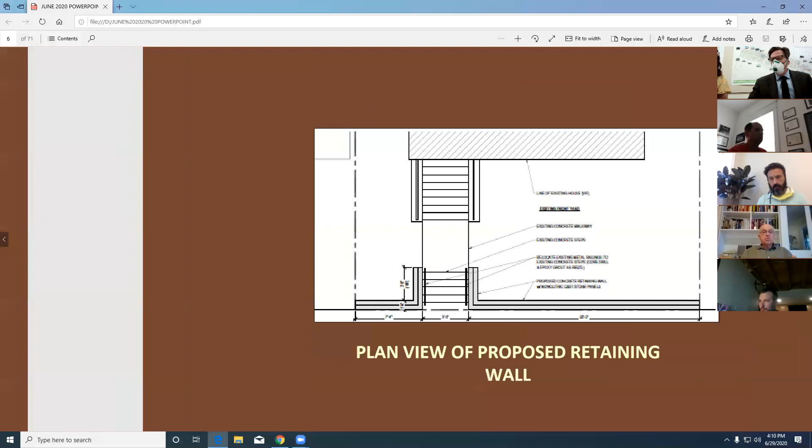No, this is Commissioner Richardson, though. I do want to just say at the outset, I will have one recusal on item B, 1116 Missouri Avenue. Okay, are there any other recusals? Okay, then let's go ahead and advance the agenda.

This is the Lafayette Square meeting, by the way. We have 4 items and 3 are in Lafayette Square, so I hope folks are ready to focus on that neighborhood for the most part.

This is an appeal of a denial at 9 Benton Place in the Lafayette Square Local Historic District. It is an application for an addition to a contributing building to the district on Benton Place. On January 30th, 2020, the applicant applied for a permit for an addition. It was denied on March 3rd.

After that, there has been a lengthy conversation with that applicant regarding this project, and the staff is recommending that the director's denial be overturned. That is our recommendation. I do know that the neighborhood association feels differently, and there are neighbors on the block on Benton Place who support the staff recommendation. So with that said, because this is an appeal of denial, I'd like to enter some items into the record.

Sorry about that, not used to having phone calls in the middle of a meeting. The first item to be entered into the record is ordinance 64689, the enabling ordinance for the Preservation Board and the Cultural Resources Office. The next ordinance is ordinance 64925, which is amending 64689. And then the Lafayette Square ordinance, which is 69112. I will note that the Lafayette Square standards have been amended under that a few times, most recently in 2019.

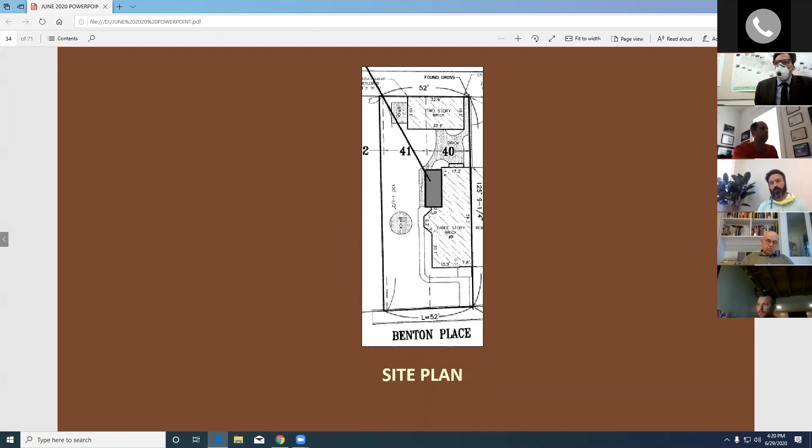Behind that, we see the design for the addition. That design is based on flat-headed windows, replicating the basic language of the model example window on the back of the building. So they're using a model example, and they're also keeping it in a frame-type appearance, because what it's replacing here with the addition is a frame open porch. Next slide, please.

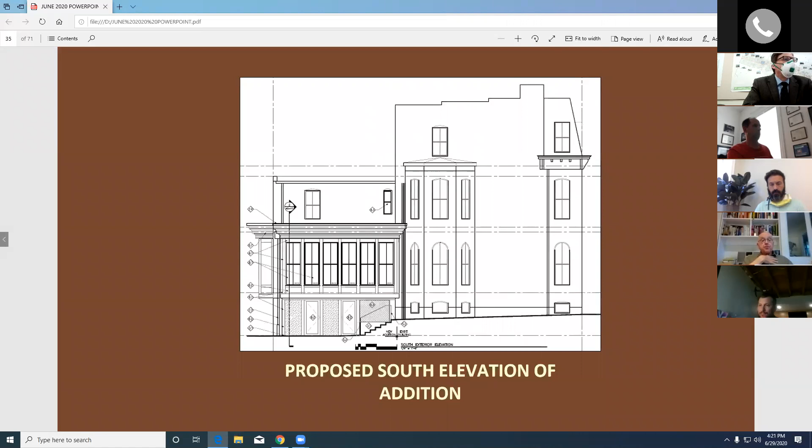So in my mind as the director, I feel like the frame porch replicates the appearance of the open porch from before, and the windows themselves are based on a historic model example, and you can't see the foundation anyway. Therefore, I feel the weeks and weeks of negotiation with staff have been fruitful, getting us to a proposal that makes sense for this site, and that's why I recommend support for the project. And with that, I'll take questions.

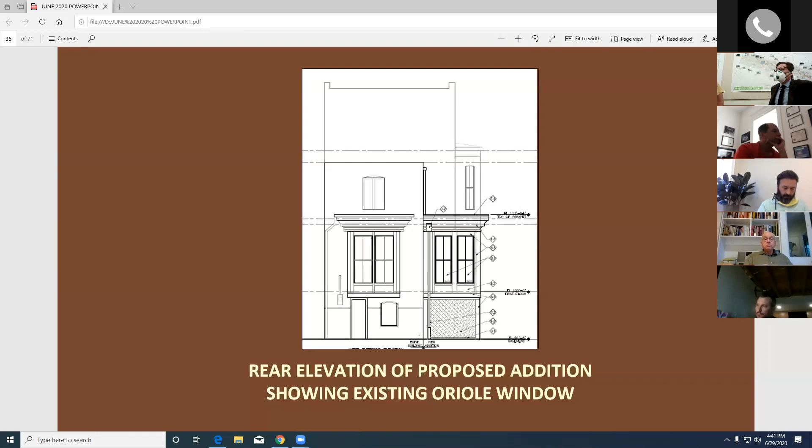Okay, we're going to do a little musical chairs here for a sec. Thank you, commissioners. Doing it this way will allow commissioners who need to leave to be able to leave. We do need to maintain a quorum.

Okay, so I think we're ready for 6152 Washington Boulevard. Bethany Moore of the Cultural Resources Office. I swear to tell the truth. This is an appeal of the director's denial for 6152 Washington Boulevard.

I would like to read into the record Ordinance 64689 as amended by 64925, the enabling ordinance, Ordinance 57688, which are the Skinker-DeBaliviere standards, as well as this PowerPoint, the agenda, this presentation, and the information submitted by the applicants and emailed to the board, including financial and other relevant documents to support the hardship claim, denied insurance claim, inspection letter from Old World Roofing, original quote from John Beal for the GAF slate line, correspondence from the owner with the new John Beal quote for Da Vinci slate, and responses from Nancy Homan of the Skinker-DeBaliviere Community Council, as well as from the Parkview agents.

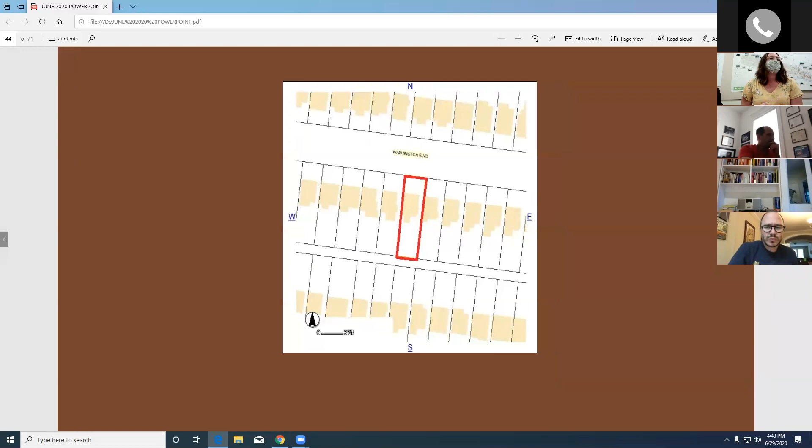So according to the standards, on sloped roofs where historic roofing material exists, that material or an approved replica material shall be used to replace it. In this case, GAF slate line has been proposed to replace the original slate. Per the standards, it does not comply because the historic roofing material is extant and is slate, so it's known, and GAF slate line is not an approved replica for slate. An approved replica would be like a synthetic slate, which would fulfill this requirement as a replica material.

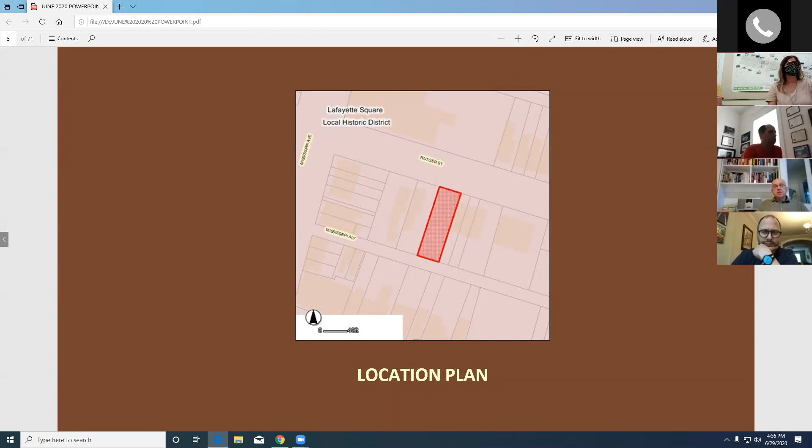The applicant proposes to construct a retaining wall at the front facade in Lafayette Square Historic District. New retaining walls are reviewed per the district standards. The proposed retaining wall does not meet the Historic District standards due to the proposed change in the slope of the yard and does not have an appropriate model example.

The historic model example that was submitted is not a retaining wall, but curbing that would have originally had a wrought iron fence on top of it. That's the reason it's being brought before the Preservation Board.

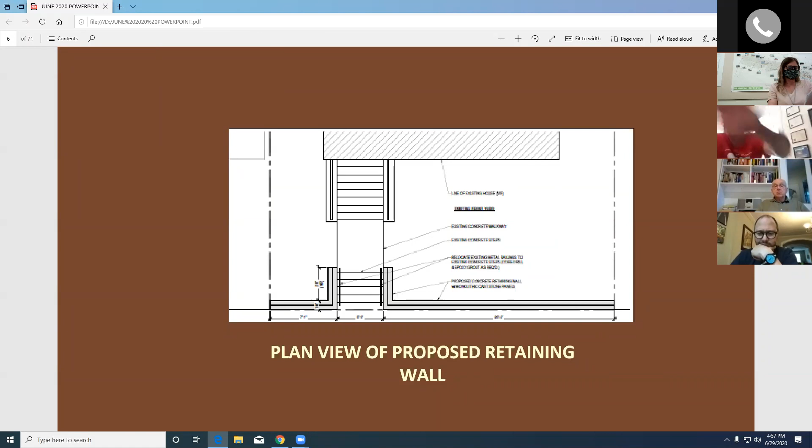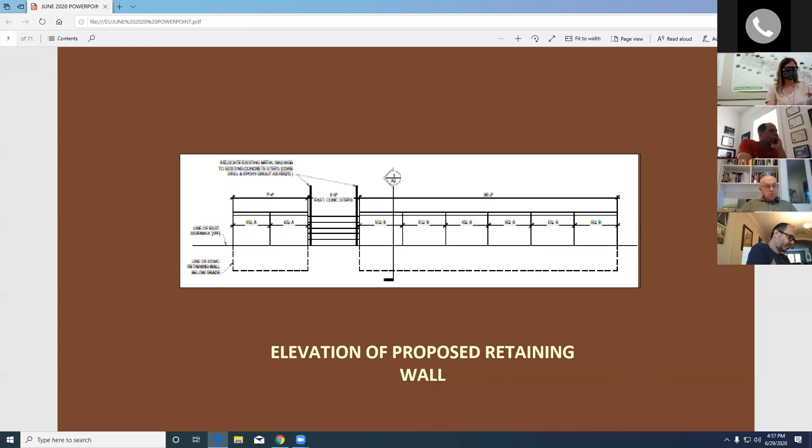This is just an elevation of the proposed retaining wall. It's supposed to be poured concrete with 4-foot panels of cultured stone and a cap.

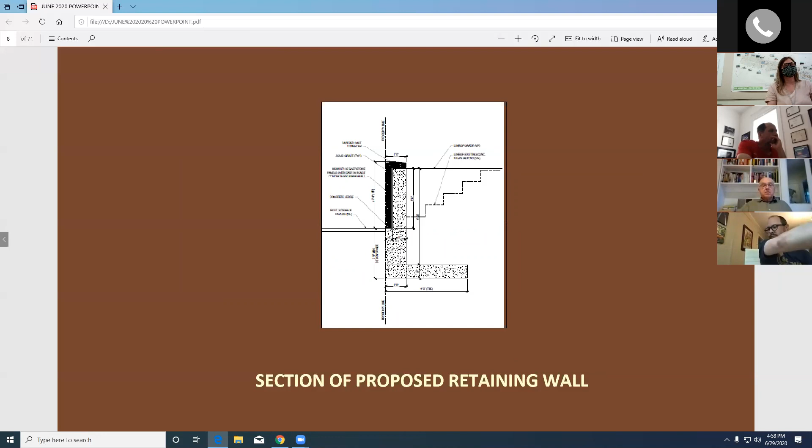The proposed retaining wall will alter the historic slope of the yard, is not based on an appropriate model example as submitted, what was submitted is not a retaining wall. The material of the wall may meet the historic district standards, but the height and design of the wall do not. Historically, you would not have found a slab retaining wall of that height or design.

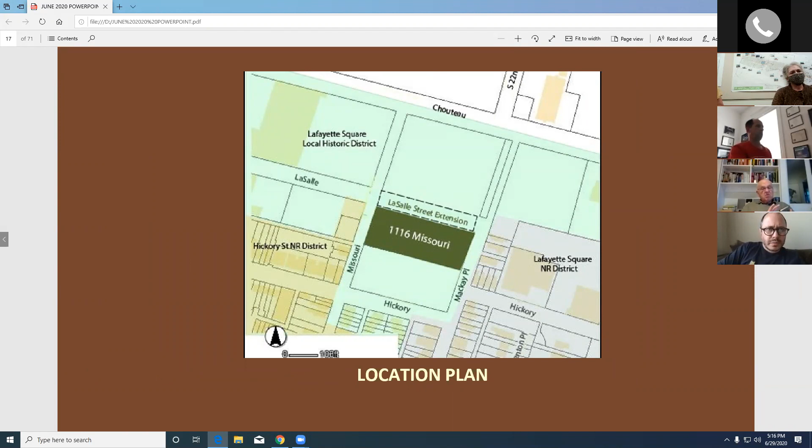Keep going, right there. This is the proposal for a 5-story apartment building to be constructed along a new extension to LaSalle Street. It will be primarily brick, 3 stories of brick on a faux stone base, with the upper story sheathed in cementitious paneling.

This is being reviewed under the mixed-use for large sites without historic context, part of the new construction standards, the Lafayette Square Ordinance.

The designers, HOK, have worked with us. Their initial submission, we were concerned, was not sufficiently compatible to the historic district fabric. Now, it doesn't need to be a replica at all, but it does need to consider things like exterior materials and scale and that kind of thing.

So this is what we refer to in staff as tier 3 of the new construction standards. Tier 1 is the ordinary infill where a model example needs to be closely followed. Tier 2 is where there is a model example identified, but there is more flexibility in its interpretation. Tier 3 allows more latitude because of its lack of historic context.

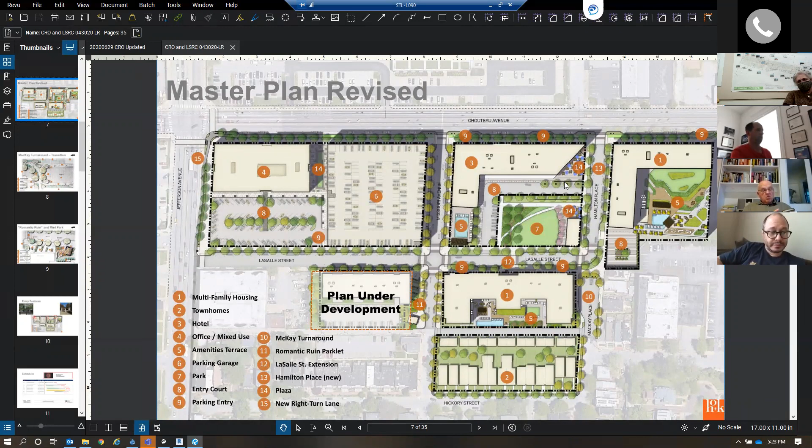Any questions on the master plan? If none, I'm going to move over to our project.

We've worked with Jan and Dan at the Cultural Resources Office and had several conversations. What we've heard was there was a desire that it was okay to do a contemporary building in this development district. However, it really needed to match the patterns of the fenestration of the historical buildings in the square. To that extent, the primary pattern in the square is this idea of a tripartite composition of base, body, and top.

When we presented this last time, we maybe had the colors a bit turned around, but here you see the three main components.

The base of the building, as Jan had said, we are proposing a cast stone. There's a series of reveals and patterns to it to give it a human scale at the sidewalk, at the pedestrian level, pedestrian experience. The body of the building is a dark brownish, reddish brick, still determining the exact brick.

That's capped off by a strong horizontal line, characteristic in Lafayette Square in the cornices that typically happen at the top of the facade, at the base of the mansard roofs. Then we go to a darker gray top that, while not mimicking a mansard roof, reads as the top of the building.

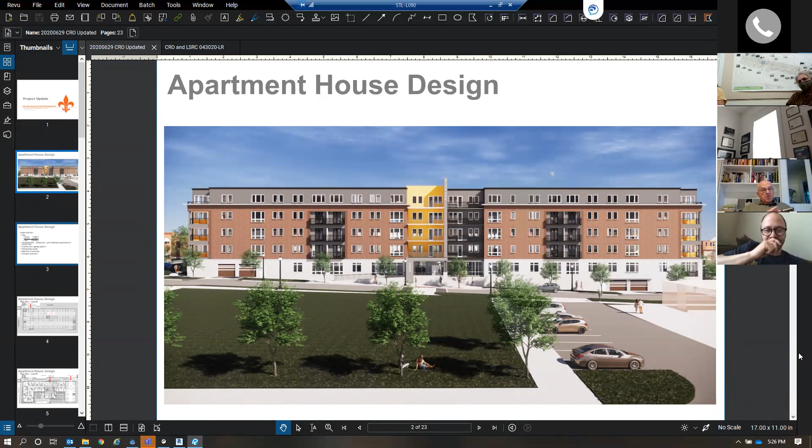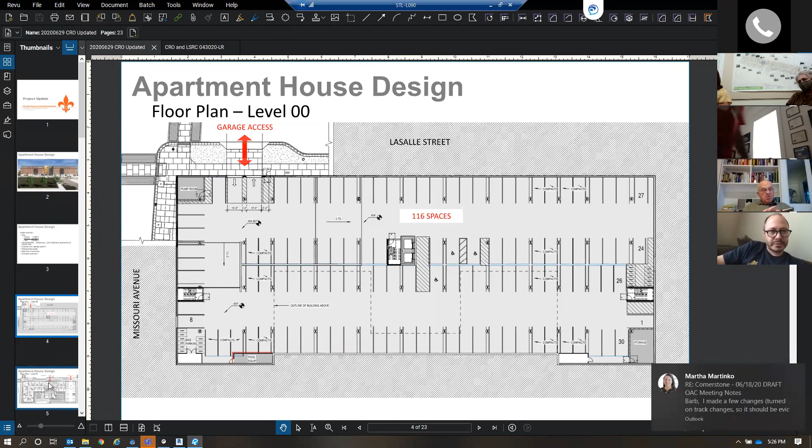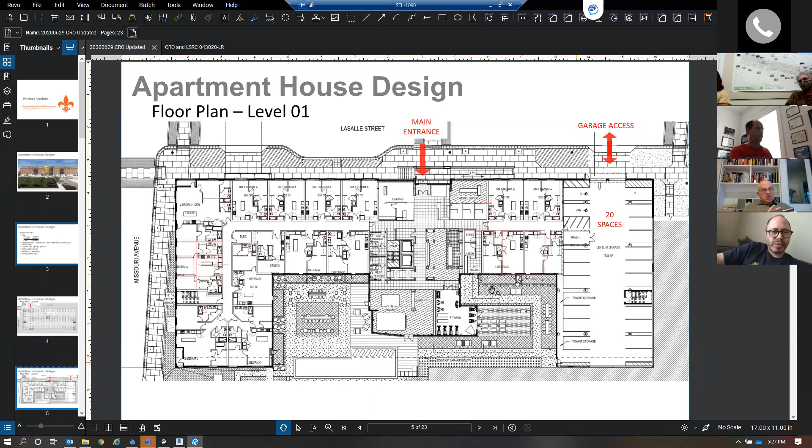The remainder of the plan has the garage entry to the east, or to the right on the plan, with 20 parking spots, and then a large amenity space central around the lobby and elevator core. The remainder of the first floor is residential, and there's a south facing amenity deck off the alley.

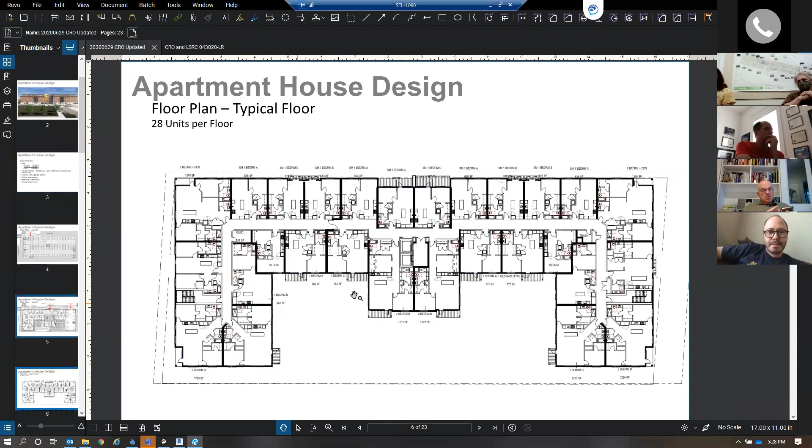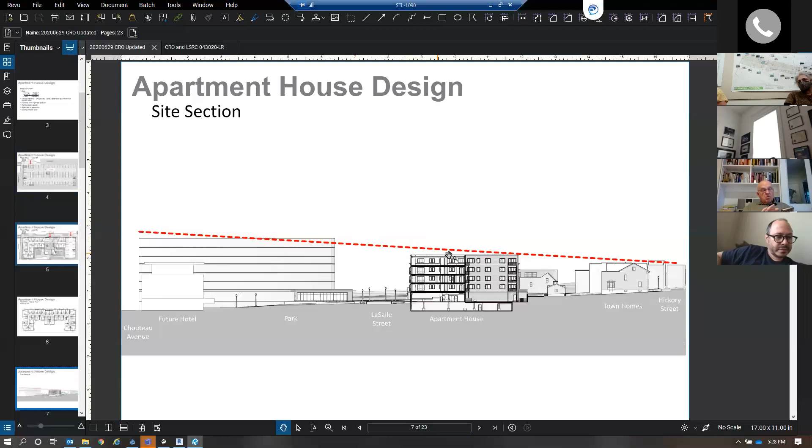What we're looking at here is a site section with Chouteau Avenue to the left, going up to Hickory Street. You're seeing some of the proposed development mentioned in the master plan on the left. At the center, you can see our apartment building, the townhouses, and then to the right onto Hickory Street. The message behind this section is that the massing is stepping down from the main commercial street, Chouteau, as we head further south into the district, with a gentle stepping down of the massing as we get to the more residential neighborhoods.

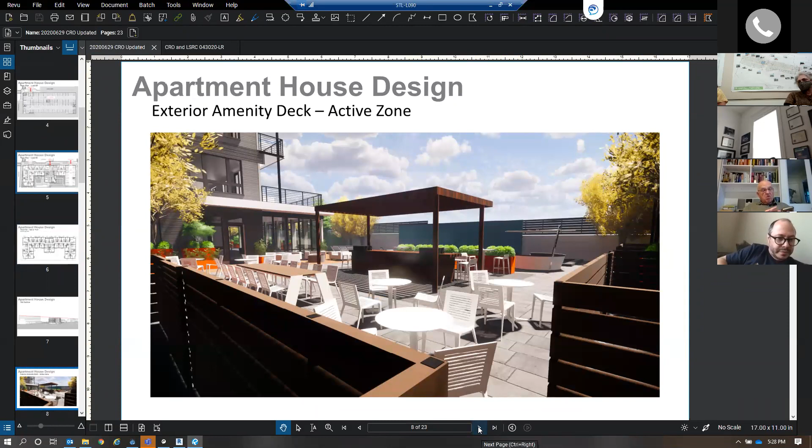A couple of views of the amenity deck. There will be a pool back there, and you'll see some passive, some more active spaces.

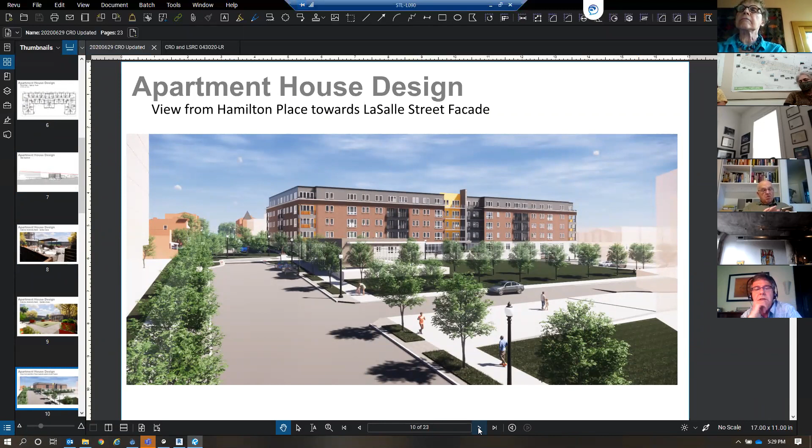Getting to the renderings, here you see the view from Hamilton, the new Hamilton Place, looking to the south, and you see that main LaSalle facade.

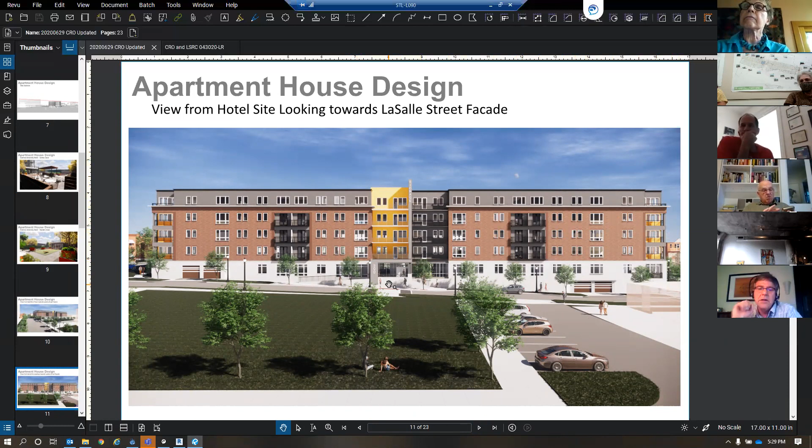Straight on here, you can see again the three components: base, body, and top, with recessed balconies and Juliet balconies. At the center of the facade, we're proposing some accent color, and there'll be a canopy over the main entry. You can see that probably better in the next slide.

As I mentioned, we worked with Jan and Dan at Cultural Resources, and one of the requests, in addition to respecting the fenestration patterns of the district, was to have a bit more articulation around the windows. To that extent, from the previous presentation we've added cast stone sills at the base of all the windows, and a soldier course at the head of each window, so you see a bit more articulation around the windows themselves. That's picking up in this image.

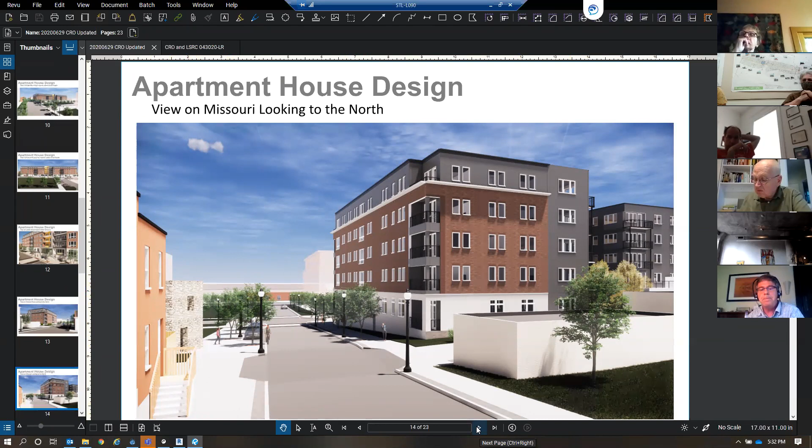Cast stone, so we're looking at a product that would have some texture to it. It would not be quite as light as you're seeing in all these renderings. We haven't gotten the colors adjusted quite properly, but it will be a gray, a light gray to look like Indiana limestone. There are two patterns and two panel sizes: one is 16 by 24, in a 1/3 staggered pattern, so it's a kind of running bond, but not quite 1/2, more like 1/3 over 2/3.

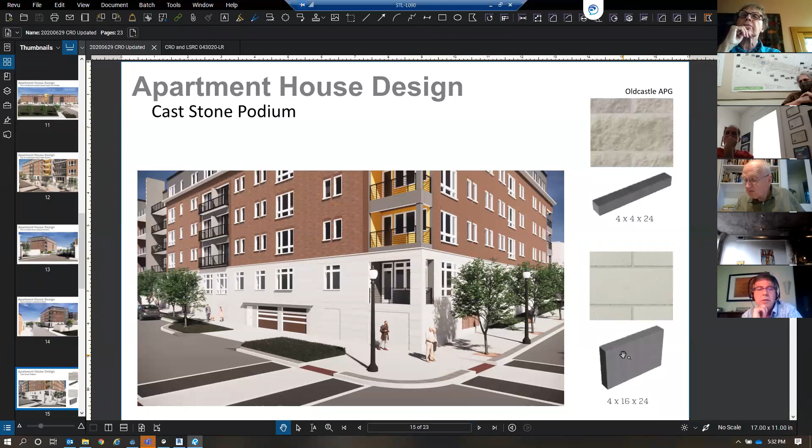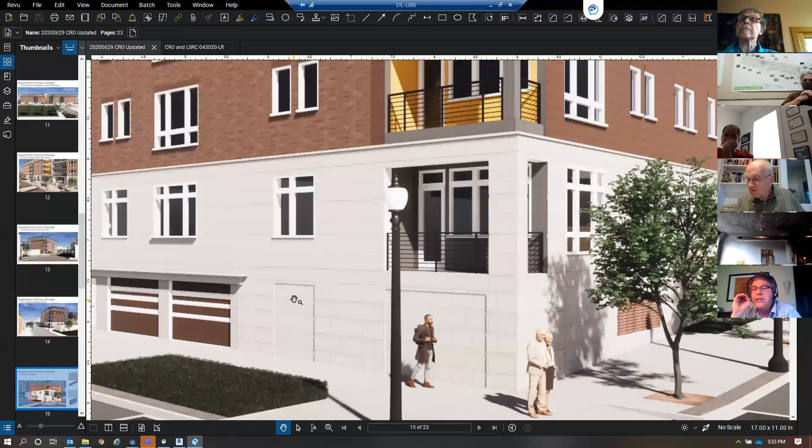And then there would be some 4 by 24 stones slightly recessed to give a little bit of rustication at the base. It starts out fairly dense at the bottom and gets a little lighter in the rustication as you get to the top, capped off by a cast stone piece at the very top. We've recessed the stone just slightly to get a bit of shadow line and a change in color below the windows located above, where it's appropriate and where it works out. So again, we're adjusting the scale for the pedestrian experience to add some articulation, some texture, some pattern there.

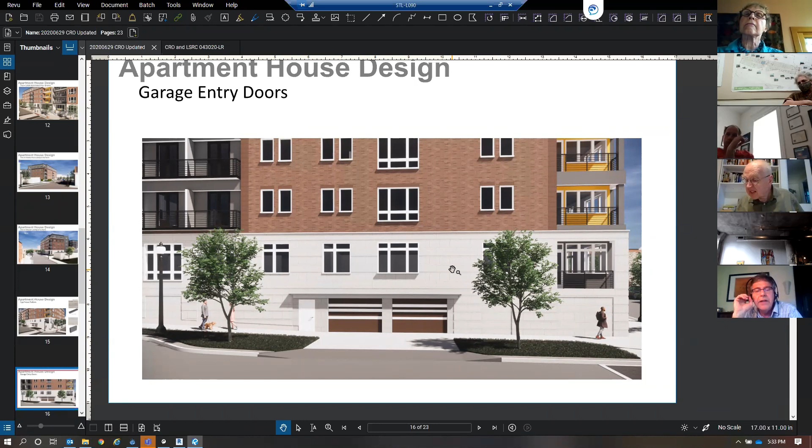The garage entries had gone from a coiling overhead door and an overhang that was very much like the projected balconies, and there was a feel that it was too industrial, a little bit too much like a loading dock. So we've modified that and introduced three components to that design. One is we've gone with a more residential look to the garage doors themselves, and each one's paired. Instead of having one large 22-foot long garage door, we have two smaller scaled garage doors.

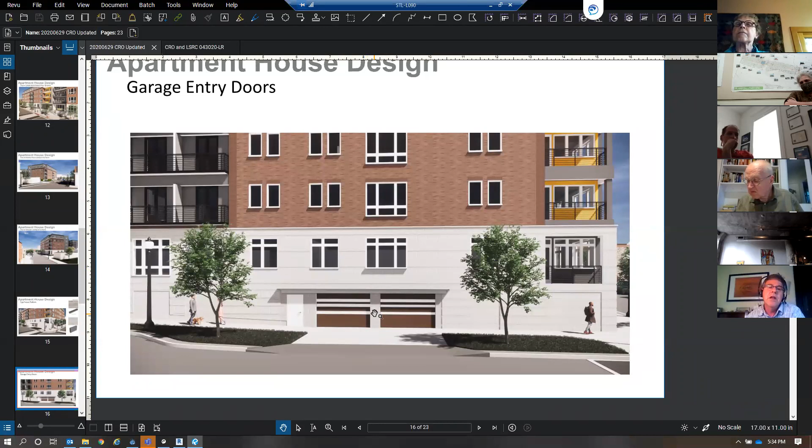We got some options for whether it's a metal garage door, a series of planks, either a faux wood or just simply a dark metal. There's the opportunity to put some glass panel inserts to switch out the wood or metal planks with a glass panel, for a very clean, modern look for a garage door.

We looked at all glass garage doors, but we felt like it looked too much like an auto body shop. So while kind of modern and maybe appropriate for a modern single family residence, we didn't feel that was appropriate here. We also added to the articulation here - it's maybe a little hard to see, but we've recessed the cast stone on either side and created a big inset that picks up the two garage doors and the people door as well.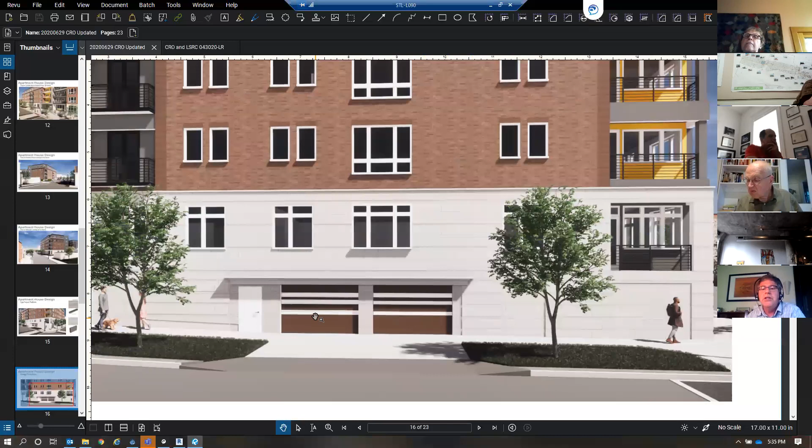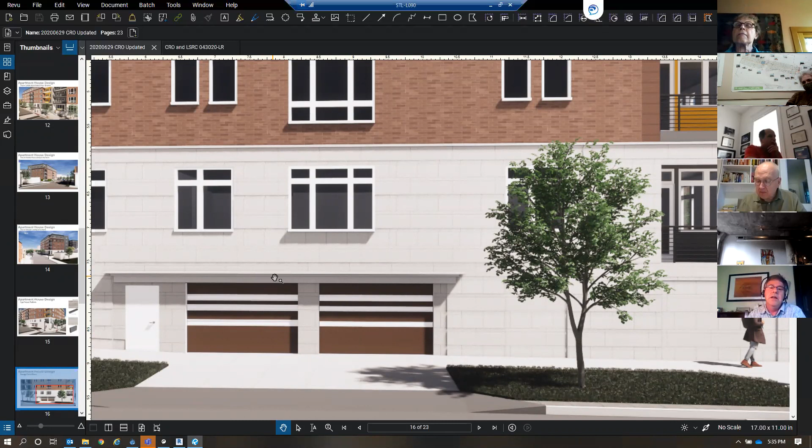The third component is we eliminated that industrial canopy and went with a GFRC projected overhang. This would have integrated downlights in it, very simple downlights to wash the garage doors. We felt that lighting, along with the residential doors, along with the more simplified cornice with a better proper material, all led to getting away from that industrial loading dock look to something that's more appropriate and pedestrian friendly.

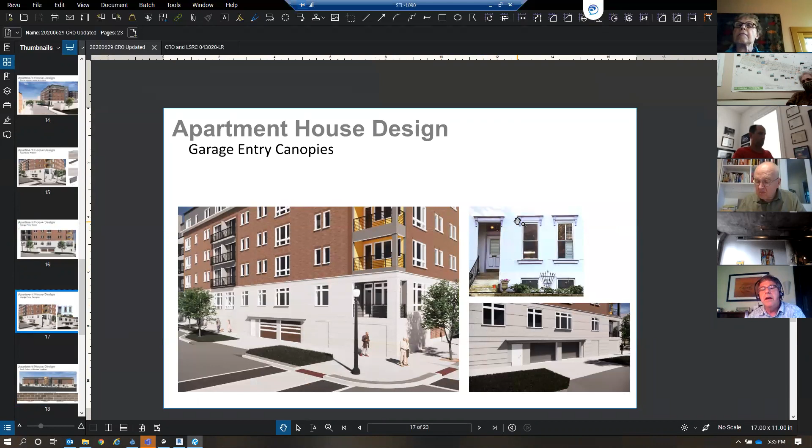Go to the next. You can see that overhang and some kind of similar - we didn't have the brackets, but some similar detailing within the neighborhood itself.

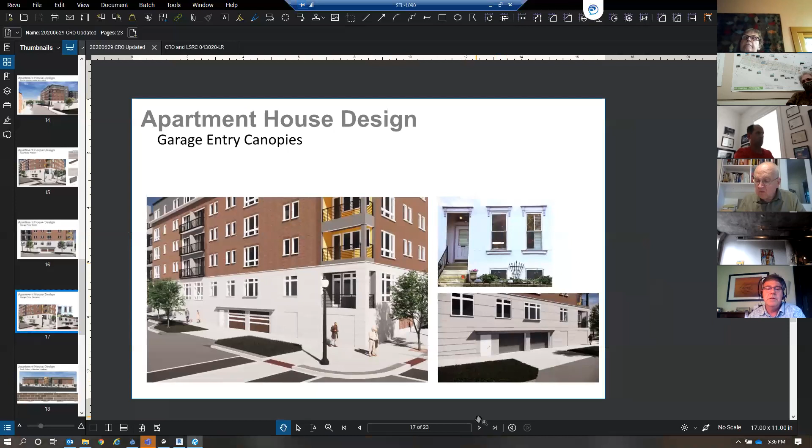The other thing we did in our resubmission was we looked at making a significantly darker brick. We actually had the reverse before - we had a dark base and a lighter body to the building previously. Now we've gone with the cast stone at the base, and we're looking at bricks that are in a brownish, reddish range. We haven't selected a final brick yet. We won't make that selection until we have both physical samples on hand, as well as mock-ups in the field on the site. This is a very tricky thing.

We're going to be looking at masonry color. These examples here are all showing a very generic kind of light colored grout. We'll probably use a darker grout to match the brick, and we think that'd be more appropriate for the neighborhood and the district as well.

Mr. Powers? Yes, sir. So this is the preliminary review, and the recommendation is to approve this with conditions. I wonder if you would pause and see if commissioners have any questions. Most certainly. Open to questions.

Commissioner Killeen? Yes, sir. Mr. Powers, did you all - I'm just looking at your design, it's very handsome, and I see a lot of work went into this. I know you didn't have to follow the standards as others would up the hill there if they were building something, but did you take a look at the solid to void ratio, the size of windows? Because it looks like, from these images, you've got smaller punched openings than what we would have seen up in the district.

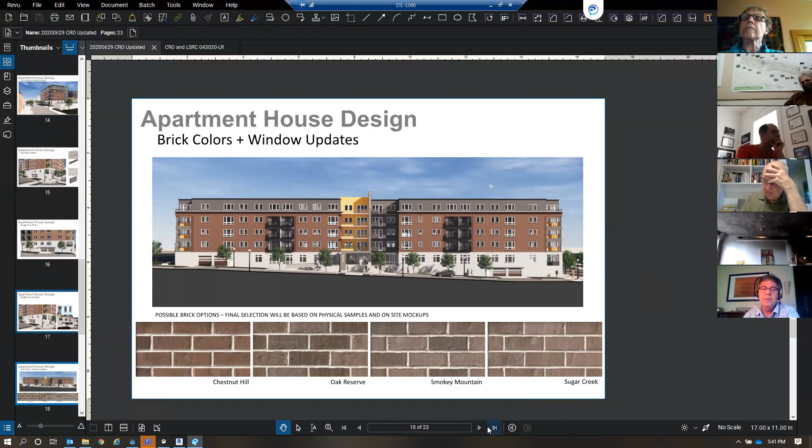Thank you, well, it was actually the next slide. So there's some at the bottom - you'll see just some different options. And we really... hold on one second. Yes, Commissioner, further questions?

Bob, I think we understand this proposal. Mm-hmm. Okay, yeah. So then just some color studies down here at the bottom that maybe engage both the recess and the red.

Is there anybody else here to speak? Jan Cameron? And I believe that there's a representative from the square also. Okay, so say that again, please. There's a representative from the square and Mr. Bill Odell, who is testifying on behalf of the project. Okay, let's hear from the square.

You asked for the square? Yes. Jan, who is here? Can you hear me? Suzanne Sessions. Okay, is here. Yes, we can. Hi. And Bob, would you leave that color design that you've got up there now? So certainly, of course. Hi.

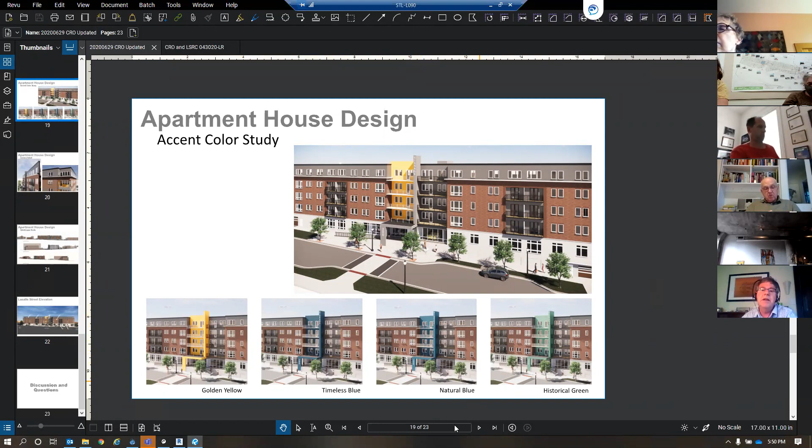This metal ribbon, I'm going to go back to wherever I was with these renderings. The ribbon, kind of describe this as a ribbon that starts out vertically, becomes a horizontal canopy, and then wraps up. That's all metal, so that's not cement board. But the accent color would be the recessed balconies, where you're really visually seeing the balcony. I'm just going to zoom in on any of these, and most of that is going to be, as you look up, you can imagine you're going to see the glass railing in front of it.

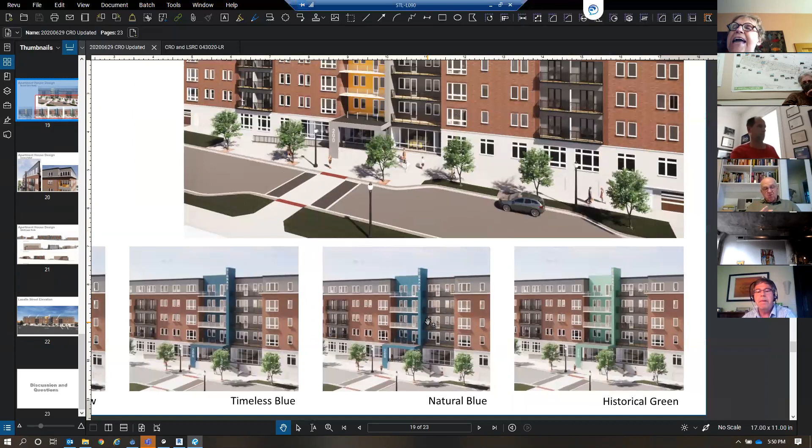But the area to the right of it is cement board. And there's that. And if you could pull up the back side, the south facing, the alley. You had it up there. You've got one that kind of faces, it's on an oblique angle. Yes, that shows a bit of it, there's part of it.

So yes, the alley facade is primarily cement board. But I would suggest there's a history in the square, and actually in a lot of neighborhoods, not just Lafayette Square, where the front of the buildings will be more refined materials: stone, rendered plaster, face brick. And as you wrap around the sides, they'll go to common brick. The alleys are who knows what.

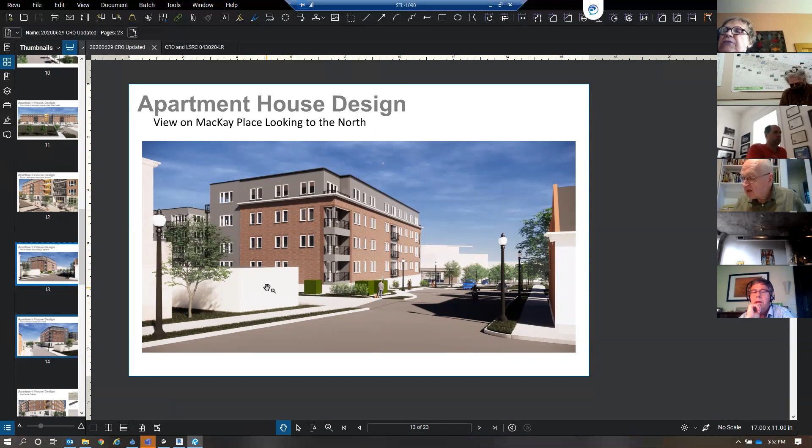We do not approve of facading with cement board on the backs of our buildings. In fact, it's our code that says that. Now that doesn't mean you can't use some cement board. Of course you can. But I think the amount you're showing, especially on this back side, takes it out of moderate, and this is where we ask you to look at a different material for all these flat walls, both on the south and north side.

And your accent walls, that's something else entirely. But I think it's going to give this a backside or alley-side appreciation, and that's not really what the building is meant to be, nor does it follow what we're saying in our code. We wanted to see all these different materials used, but it's just as you put it yourself, you're treating it as a less-than, front-of-building appearance.

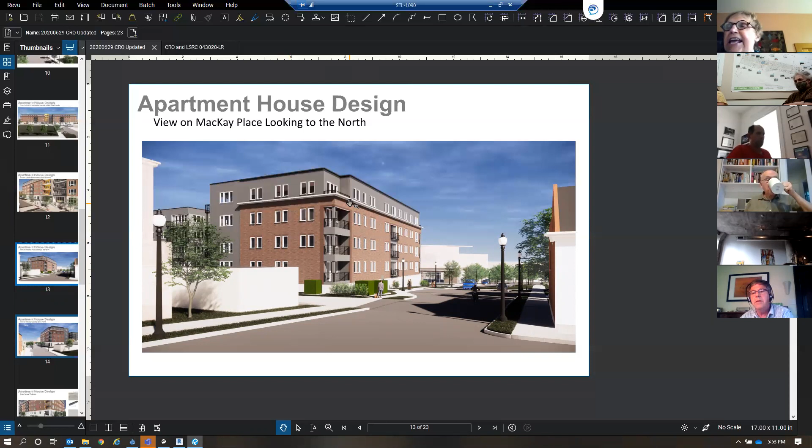And it can be a lesser material, and I don't even know what to suggest other than cheaper bricks or some of these other cement boards. But please give us brick on our walls.

Suzanne, is there anything else? No, that's about it. Thank you very much. Who else, Jan? I believe that's it. Bill O'Dell.

He's here to answer questions, just answer questions if you have them. Anybody have questions for Mr. O'Dell? Commissioner Killeen: I have a question for Suzanne Sessions, actually. Then let's finish it in the other order. Does anybody have a question for Mr. O'Dell? And I can make a brief statement at the right time.

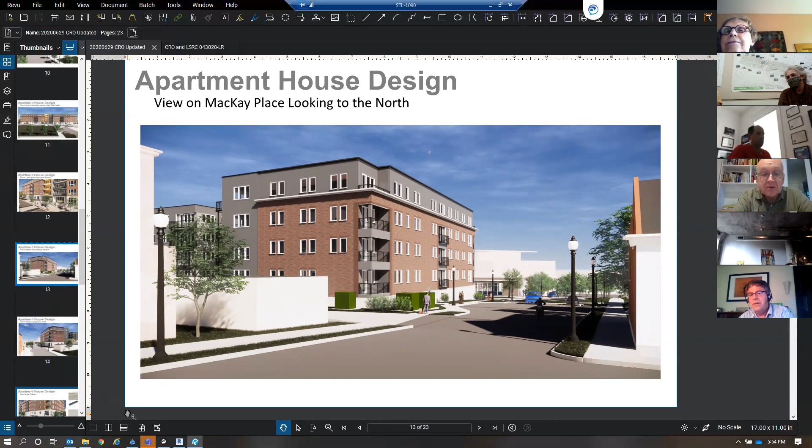Okay, go ahead. We've worked for nearly 3 years with the neighborhood. I think we have a design that's met many requirements over the years, and particularly this spring as we've gone through this design. I would urge you to support it. We need to get this project going. It's been 3 years and going.

Great, thank you. Commissioner Killeen: Suzanne, what did you think about that solid-to-void ratio and the size of the windows issue I brought up? Honestly, Mike, I hadn't even considered it. When I looked at this the first time, my eyes went to the mansard, the body of the building, and the base of it. But I can see your point. I could see where the larger, taller windows next to the accent yellow wall are more pleasing to the eye, but that's not as big a concern to us.

But it is a concern now that you mention it, I can see that. Our concern is we just don't want to see a second-rate material put on that much of the building. You can say what you want about it, but it's not the quality that brick is. Okay, thank you.

Anybody else? Questions? Jan, is there anybody else to speak? Sure. Okay.

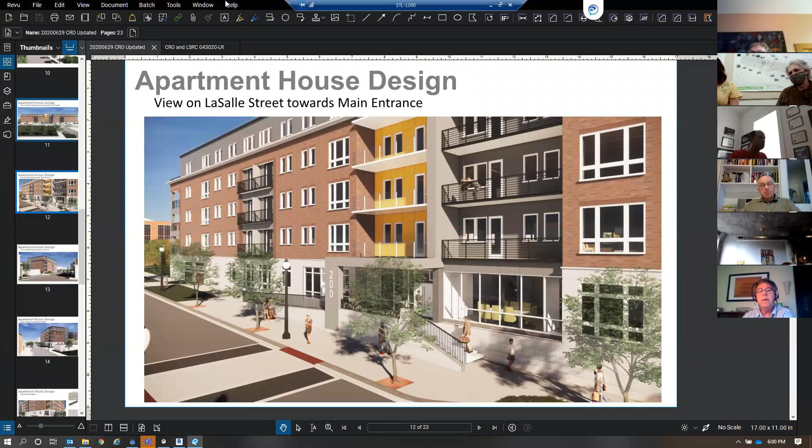Commissioner Richardson, are you here? Yes. Do I hear a motion on the final 2 agenda items? Yes, I move that the Preservation Board direct the staff to prepare a report for the State Historic Preservation Office, that agenda item E meets the requirements of National Register Criteria A for community planning and development, and that item F meets the criteria for A commerce. Is there a second? Second.

Is there any discussion? Would somebody call a roll, please? Vines - yes. Richardson - yes. Kotar - aye. Fathman - yes. Hamilton - yes. Killeen - yes. Robinson - yes. And Callow - abstains. All right, that's 1, 2, 3, 4, 5, 6, 7 yeses, 1 abstention. Great, the motion carries.

Director's report. More musical chairs. Richard? Yes. This is Melanie, before we adjourn I have a question to ask for future meetings, okay? Yes, I'll remember, after the report. Thank you. More muting, please.

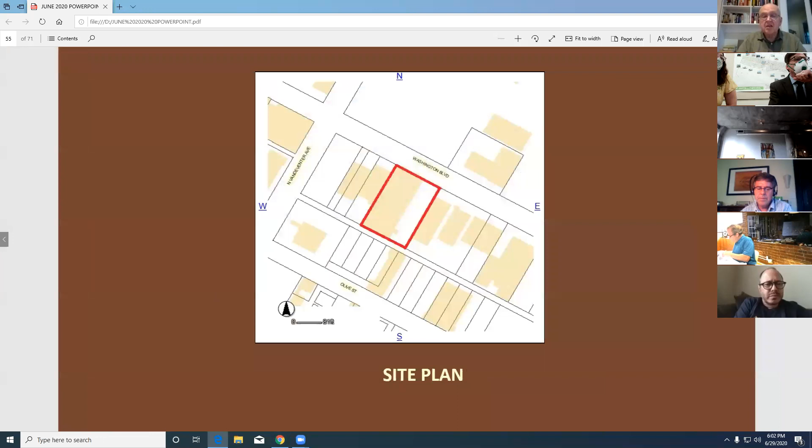So if we go back, just make sure - so it's, some of it's not coming through for some reason. Okay, all right, well I have a director's report. This is supposed to say director's report as the cover page, but obviously the letters dropped off of it. So let's go to the next slide. Actually, can we make the screen slightly smaller? Is there a way to do that?

Okay, so there was one item that was on your preliminary agenda that didn't end up on the final agenda. That is a preliminary review for a house at 2250 South Jefferson in the McKinley Heights Local Historic District. Is it a ghost house? Pardon me? Is it a ghost house?

I promise that the future items in this presentation will be of higher visual quality than the ghost house.

As you can see along this corridor, the common house type is a brick-based townhouse design. The design will be very similar in style. We'll work out some final details. I don't think the doorway works out especially well here, but...

This is a project at 2010 Crittenden in the Benton Park district. The picture on the right is a building that actually came to the Preservation Board because the owner had put in a garage without a permit. There's a vacant lot on the side of that building. In the illustrations on the left, the center illustration shows the building that is there currently, and it also shows the proposed subsequent construction, which, in accordance with working with the Benton Park Neighborhood Association, garnered their support and the alderman's support. Therefore we chose not to bring that to the board, but this is a new construction project that will most likely take place in Benton Park.

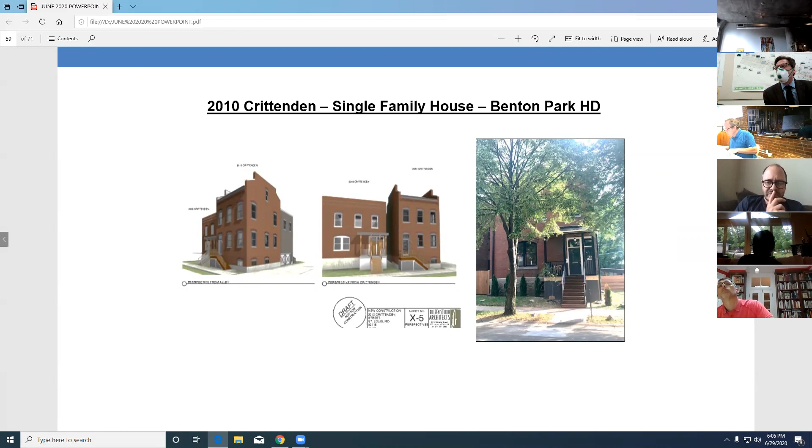Likewise, this is also a project that garnered support from the Benton Park Neighborhood Association and Alderman Dan Guenther. This is a really interesting project. The developer is a furniture maker himself. This building is very contemporary and modern on the back, but the front follows the vocabulary of the historic buildings, while also having an interesting roof. I believe the roof on this is going to be copper, and I think it will be a compliment to the neighborhood. Next slide, please.

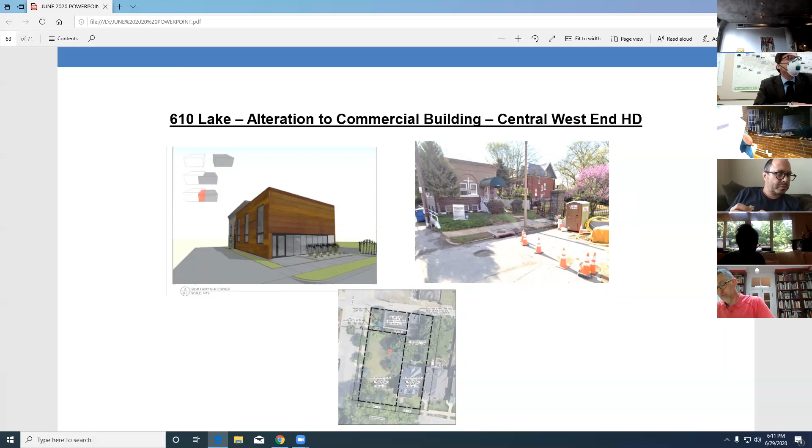Director Krasnoff? Yes. You know who else lives on that street, right? Yeah. Okay. Everything's okay there? Yes. Good.

The Central West End Association is reviewing that now, but I don't anticipate this coming to the board because there is a consensus on the project. Next slide, please.

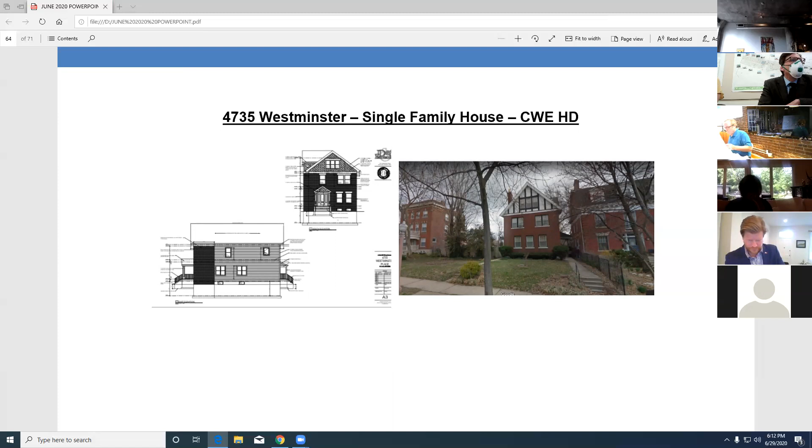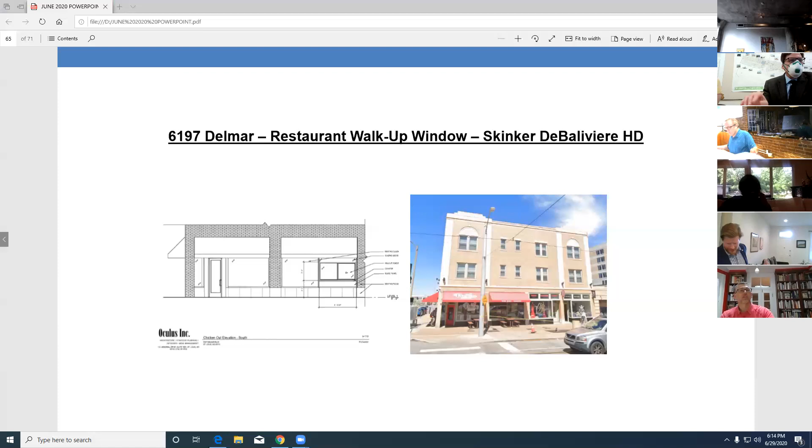So we are setting a bit of a precedent here. It makes me a little nervous, quite honestly, but walk-up service is something I think we're seeing more of now, especially in the age of COVID. The staff has gone ahead and recommended and supported this project at the staff level. I would have voted for it. Okay, duly noted. Next slide, please.

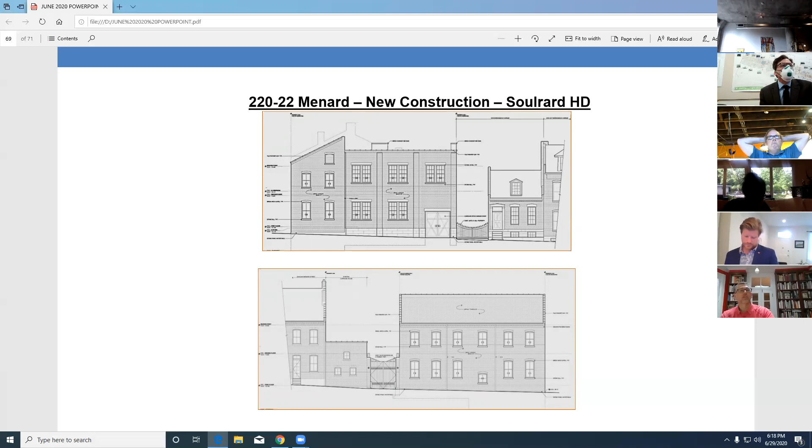So you can see there's the portion that extends along Menard that is a flounder-type design. And then you have the portion of the design to the east of that, which extends along Shenandoah, that is more of a typical industrial design with some pilasters and some paired multi-light windows.

Again, I think this is a case where the design that was shown to the board is what got executed here. I think it was well done. They've really finished out that corner in a very urban and robust way. And I think that's a project that's a complement to the Soulard Local Historic District. Next slide.

Next slide says we're done. So that is my director's report. And if there are any questions, I'm happy to answer them.